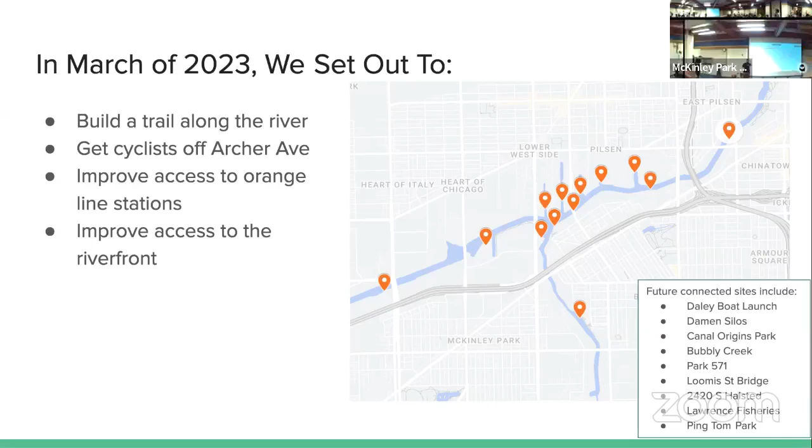This was our first map. We made it on Google to show how crazy it was to try and get to all these places along the designated bike paths. So 49 minutes if you stick to bike routes, 20-some if you went straight down Archer, and this is one of the problems that we're trying to solve, because you have to choose between getting where you need to go on time and getting where you need to go safely.

So in order to do this, we are taking advantage of some policies that already exist. So, Eladio, the project manager for this one — as you read through the physical thing or you look through the online document, and as we go through the presentation, you'll see that there's a lot of things that require big construction that are super expensive. And we're hoping that the new design guidelines for Chicago take care of a lot of that.

In 2019, the city updated the river design guidelines, and those require that anyone who buys land along the river and develops it has to create a public walking path. So it's very specific. You have to do a 30-foot setback from the edge of the river, and you have to create a 10-foot trail with gravel on the sides, specific local plants and trees, specific seating, specific lighting, and that kind of stuff has to happen.

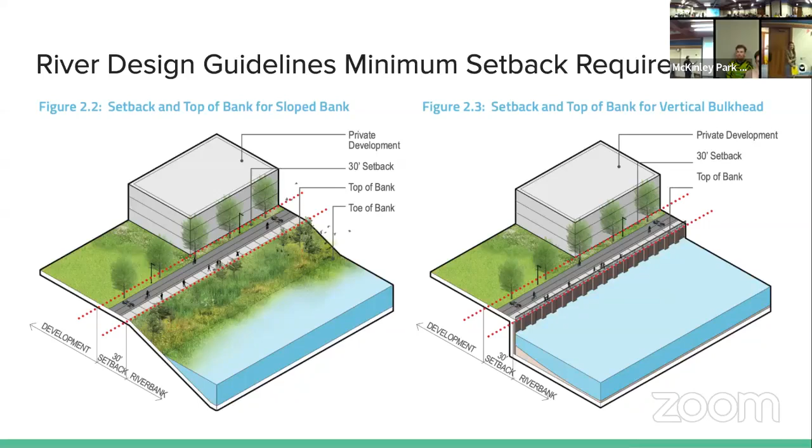And so that'll take care of some big chunks of our project. We'll also talk about the pieces that have to be done by private landowners who aren't going to do that. But here's some other pieces of the river design guidelines that specify what has to go on there if you build something on the river.

Like I said, 10-foot path, 2 feet of shoulder, specific trees. And if you've been to the South Halsted Riverwalk, which is right behind the Orange Line Halsted stop, you can see an example of a bike path, a walking path that has been built to the new guidelines.

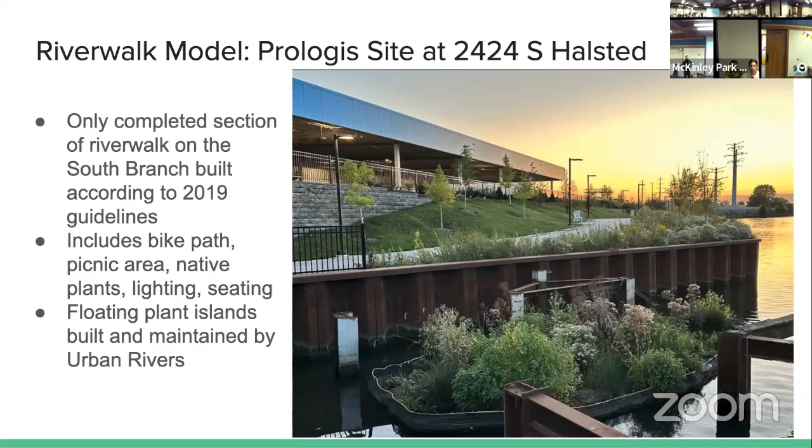So it's very pretty. If you get a chance, head down there, it's right behind the Orange Line station on Halsted. It has seating, lighting, even a floating habitat that our friends at Urban Rivers installed there. This is what the rest of the Riverwalk could look like as we progress through the years, and folks have to do this as they buy land.

And now we'll have Heidi from Living Habitats. Living Habitats is our landscape architecture firm, and they've done the physical work of making these amazing plans for us.

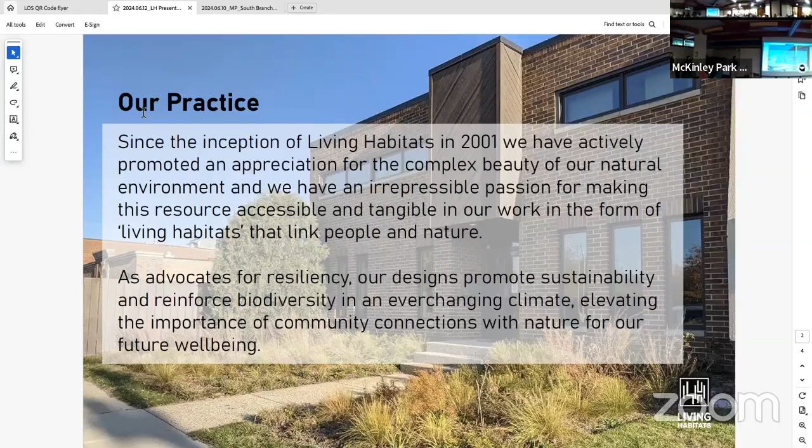To give you a flavor of the different projects that we tend to be involved in, they range in scale, and this project also demonstrates a very wide range of potential project scales that will be implemented.

To give you a little highlight, our sample project work ranges from local projects like the Chicago Botanic Garden, which many of you may be familiar with. We've got a 20-year relationship with that organization working to restore their 6 miles of shorelines, around 60 acres of lakes. We have an incredible amount of experience dealing with terrestrial and aquatic environments and how to bring people and nature together in those spaces. It's the largest garden now at the Chicago Botanic Garden, the shoreline restoration of all native species.

A little further afield, out in the Los Angeles area, we've been involved for the last several years in the Wallis Annenberg Wildlife Crossing. This is a very large project promoting habitat connectivity and restoration, in this case very specifically targeting the mountain lion and an endangered population of that species that needed increased connectivity to bring together habitat islands. Again, we have many similarities to what we're experiencing here in the city, where we have pockets of bright spots that we want to link together.

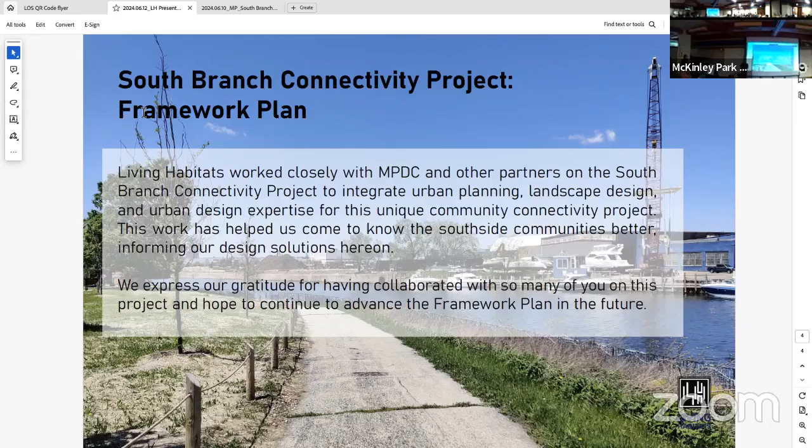Oh, it's been a year. I know, it's really weird. And a lot has happened this year. We're very excited about it. So let's see what they did, all right?

As somebody mentioned when they walked in the door, I opened up this plan and I didn't know it was 90 pages. It's not, we're obviously not gonna cover all of that before the library staff wants to go on.

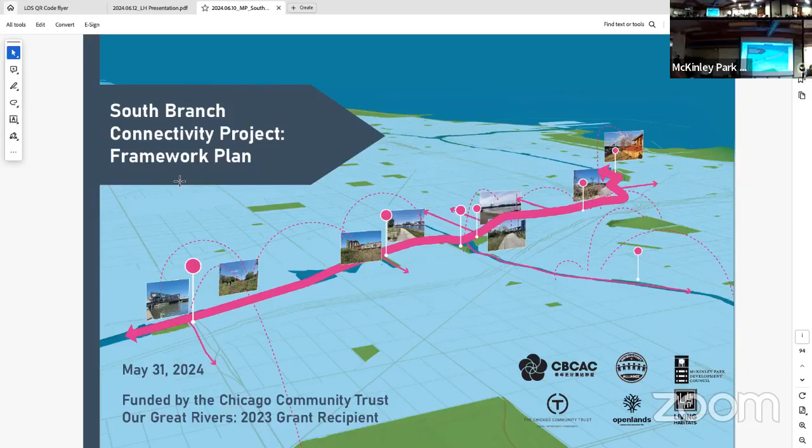So this is the area that we're looking at, and you see it's a lot bigger than just the river, right? We're not just looking at how you move along the river, but also how you would get to the river and how you would use a riverfront path to get to other places.

So while the path runs here on the south bank, and physically goes through McKinley Park, Bridgeport, and Chinatown, those aren't the only neighborhoods it impacts, right? Obviously, if you live in Pilsen or Little Village and you want to come down to catch a train on Western, Bridgeport, or Ashland, that impacts you too. So I want to point out that while it goes through 3 neighborhoods, it directly impacts at least 6.

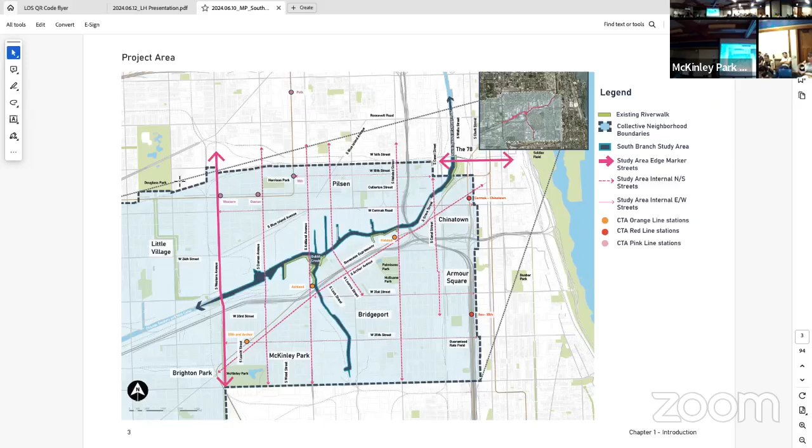So some things that came out as more boiled-up goals in the final version of the plan are to provide a continuous multi-use trail from Richard J. Daley Boat Launch, which is the park just on the western side of Western Avenue—the mythical land that most people don't know is there.

All the way to Ping Tom Park in Chinatown. This names out specific sections of the park we need to look at, and calls out the fact that the Prologis section near Halsted is already there. So how do we do that? Well, one of the things we want to do is improve safety, mobility, and accessibility for cyclists along the South Branch and adjacent areas.

I also want to call out that we are calling for improvements to Archer Avenue, which several people have already asked about tonight. Yes, of course we want bike lanes on Archer Avenue. This isn't meant to be an either-or, but given the way the state is moving with the parts of Archer they control, we might actually get this first. So we'd like to have both—the place you can take your kid for a bike ride, and the place you might want to hurry up and get to work. That's not usually the case.

A couple other things: improving access to Ping Tom Park from 18th Street is also important. One of the ironies is that Pingtom Park exists because nobody wanted that property—since you can't get to it, that's how they got the land for the park. However, now that the park exists, everyone wants to get there.

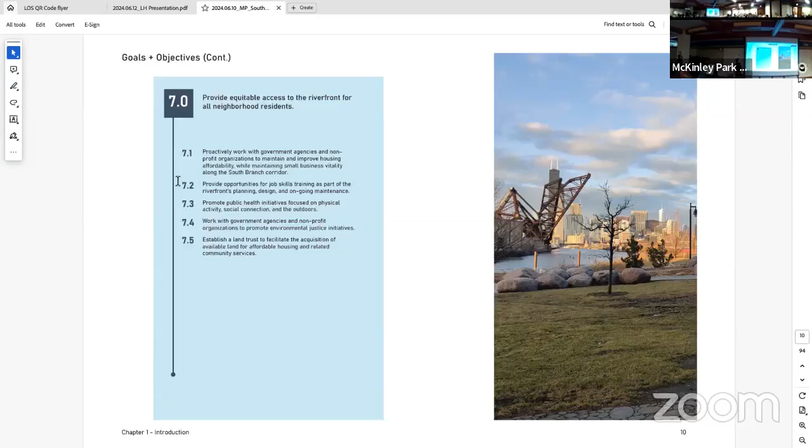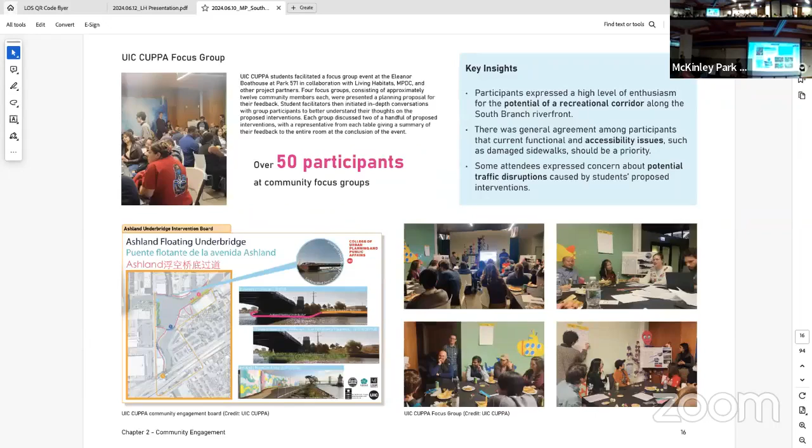So community engagement, quite a few of you were here for this event. It took us a while. Overall, we had over 600 neighbors who participated in community engagement events, whether you came here for a talk, attended one of the focus groups with UIC, or one of the small events. We had about 100 surveys, 200 participants, really 250 participants at some of those events, and then even more people for our lecture series that came along with this.

And I want to get down to where we actually landed on it. So, things that are important: people want a low stress biking and pedestrian network. People value existing parks and they want to use the riverfront to create additional recreational space.

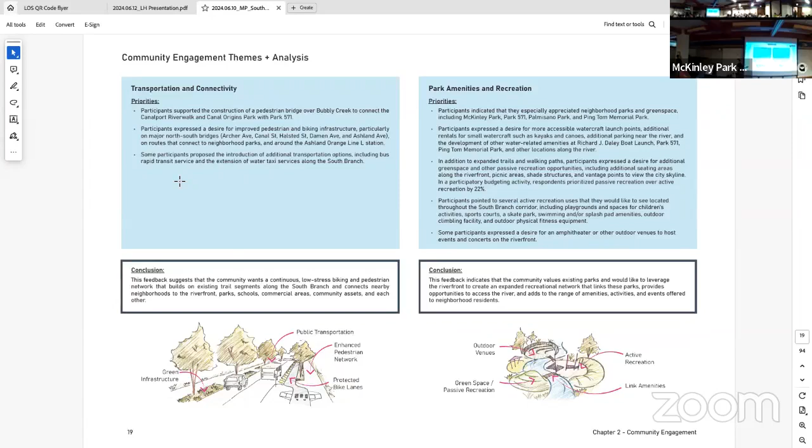Including active and passive recreation. When we say active recreation, that's things like playgrounds and sports fields. When we say passive recreation, that's more like running, biking, or fishing.

People want a real sense of place, to use some of the industrial relics and maintain them, to kind of keep the vibe of like, hey, there's something here, this is part of something, this thing has a history, but at the same time to also move forward.

And also to have, in the long run, some interpretive signage to explain things that happened. Like, for example, why was Bridgeport an Irish neighborhood? Because they came here to dig the canals. What about the Native American trails that became Archer Avenue? Yeah, so things like that about our history, how different groups of immigrants have come in and out of here, and how that shapes the city as we know it today and how that shapes our neighborhood.

So we do want to honor all of that and the things that go on with that in the future. That also feeds into arts and cultural community gatherings. One of the most cited places people want to get to is the National Museum of Mexican Art, which is interesting, in Pilsen.

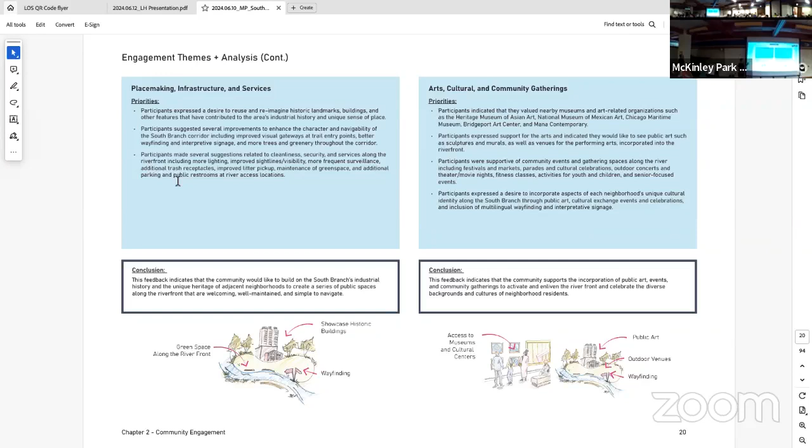So we are looking at, like, there's a lot of things that people want to be able to get to, and they range from Mariano's, because that can also be very difficult on foot trying to get around Bubbly Creek, Mariano's or Jewel, or getting to work, but also cultural assets like museums and other community gatherings.

All right, environmental and sustainability goals. People certainly want to see continued environmental cleanup. We do have Superfund sites on this path, and that is one of the reasons that development will take a while. We do also know, and we'll get to it in a little bit, that one of them is projected to get cleaned up this year. So things are moving at the speed of government, but they are moving.

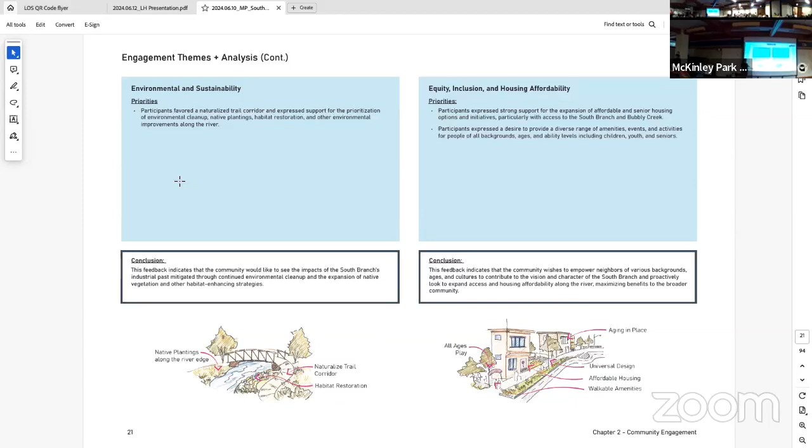That also feeds into land use and zoning policy. On the one hand, a lot of you and a lot of us have been very involved in trying to keep new heavy industry out of here. Doing that in the long run does mean changing land use and zoning policy, and that's also something that takes a while, but it's all part of this plan.

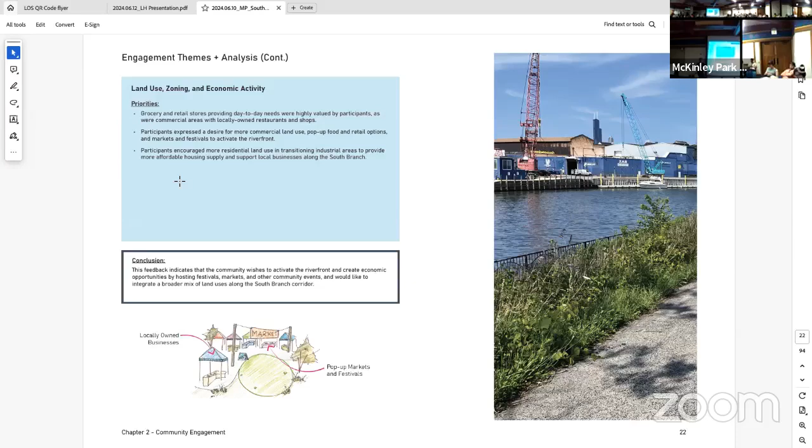Question on community engagement. I mean, you're here, right? So you're doing your part.

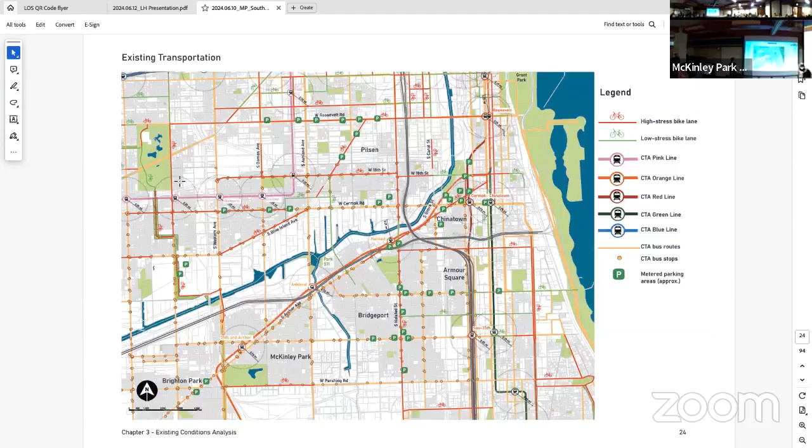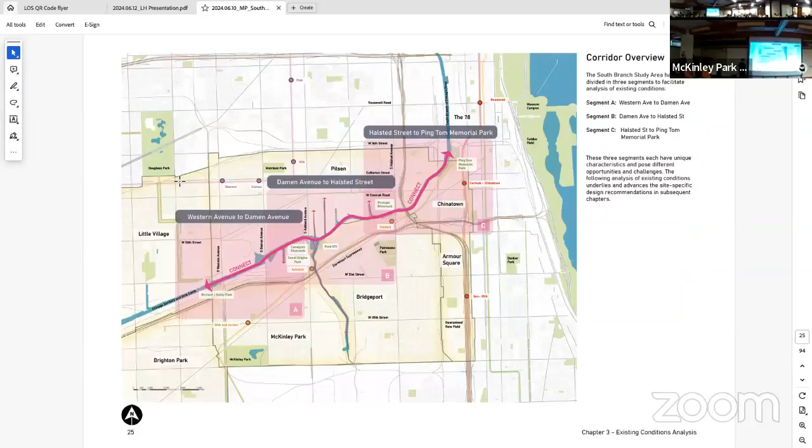So existing conditions. There's a lot of stuff on and around the riverfront, with varying conditions, shapes and sizes. So for purposes of the plan, we've split it up into three sections: Western to Damen, Damen to Halsted, and Halsted to Ping Tom. You'll see why that's important, and how drastically different the conditions are in those three sections.

So here is Western to Damen. In many ways, this is going to be the hardest part to implement. Unless you've seen it from the water, you probably have not seen the river edge at this location. All of this right here is a natural river edge, which is a great opportunity. It's the only section of our path that is still a natural river edge, heavily forested. It's beautiful, but that also makes it inaccessible, right?

So what will happen with those sections really depends on what comes next. The first part we want to talk about is the Western Avenue Bridge—some of you might have attended the meeting a while back. The Western Avenue Bridge is supposed to be renovated, shored up, in the not terribly distant future. CDOT has published drawings that do include bike lanes on the bridge, but nothing for getting on and off the bridge, and nothing to connect to at the foot of the bridge. So there is still a condition where you literally cannot safely cross Western on foot between Blue Island and about 34th, 35th. That's something we would like to remedy, to get a way across Western, because nobody needs to be running across those giant concrete pillars to get from one side to the other.

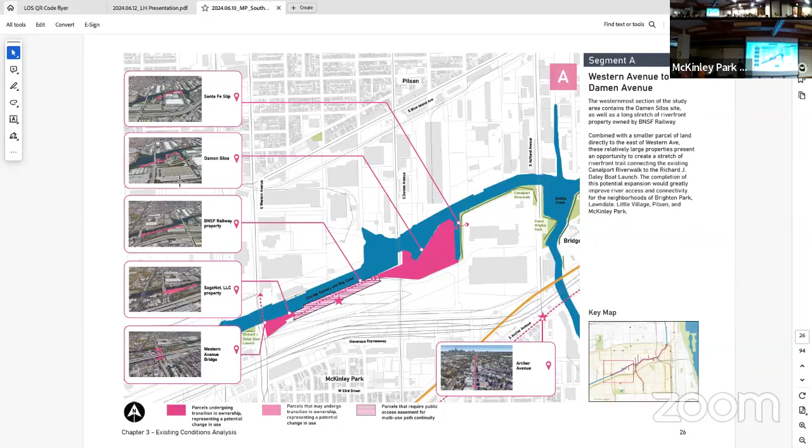So next, get this in. All right, great. So the next section we're going to pick up is Canalport Riverwalk.

I want you guys to know that there's a coming change here to this lot. The existing owners want to build a new building on their lot, and the initial plans seem reasonable—they're not going to be changing the lot lines, so it won't directly affect the park. But one of the things we're hoping to work with them on is getting some better signage into Canalport Riverwalk. When Eladio and I went to the meeting with them, one of the first things they said is that there's this park across the street and it's really nice, but you can't get there. So we are cautiously optimistic that we'll be able to work with them to improve that situation, since they seem to want to use it for themselves and their employees.

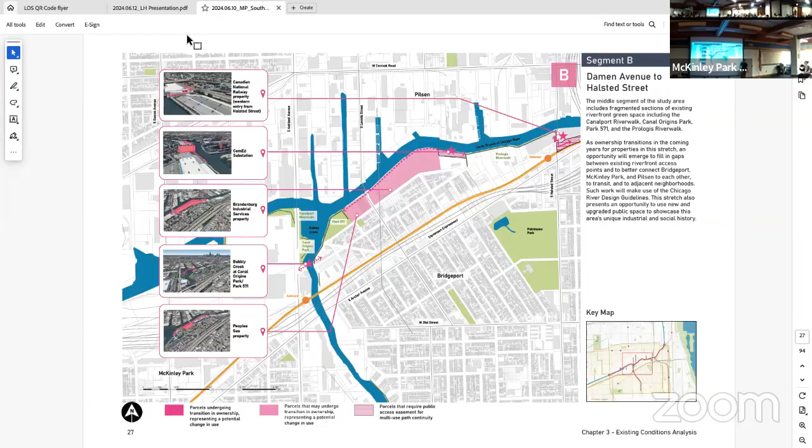No, not having it. All right.

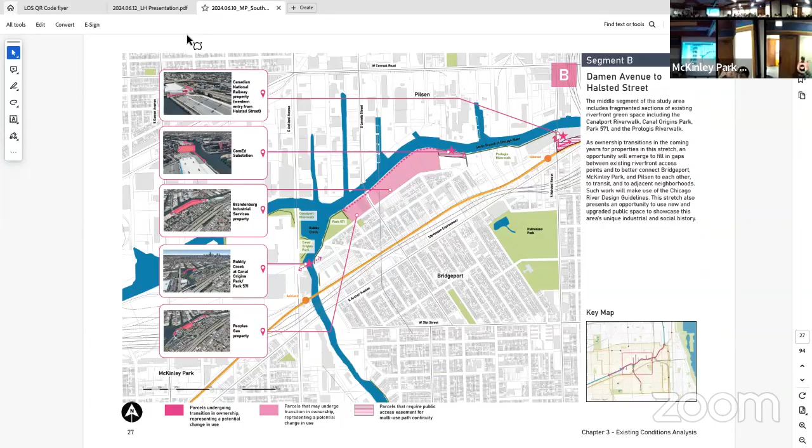Okay, so this is that same section in yellow that I just talked about, to help you get oriented. What happens after that is really interesting. You might have never noticed Grove Street, but it's about to become a lot more important to Chinatown.

So on the corner right here, here's Wilson's Place, here's Marketplace 88, Chinatown Square is this way. Right here, at Cermak Canal and the river, is a historic building that's about to be renovated into a hotel and Asian lifestyle center. And all of their traffic is going to come onto Grove Street. So this is Grove Street here.

Grove Street is only paved to about here, and the rest of it's dirt. But it exists already, so we are asking the railroad to help us with their section - unpaved, but it's there - to connect to what's called this little sliver of IDOT, and the rest of it's CDOT. We're just asking them to pave an existing street and open it to bicycles.

And that will connect to this new property, the Pacific Development, which has streetscaping as part of its development plan, so the developer will be required to do their section there. We're working with them and with DPD, and we got the initial plans. They had plans for 100 bike racks, but no - we're like, come on guys, somebody think about the rest of this, right?

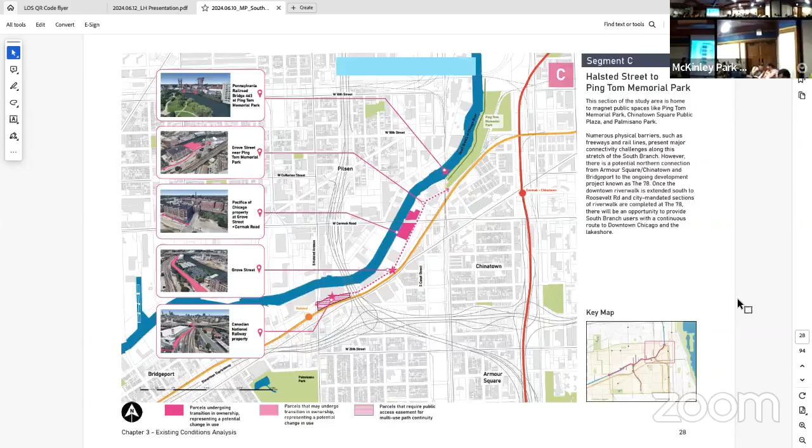All right, so we're gonna fast forward a bit here, to talk a little bit about what's next.

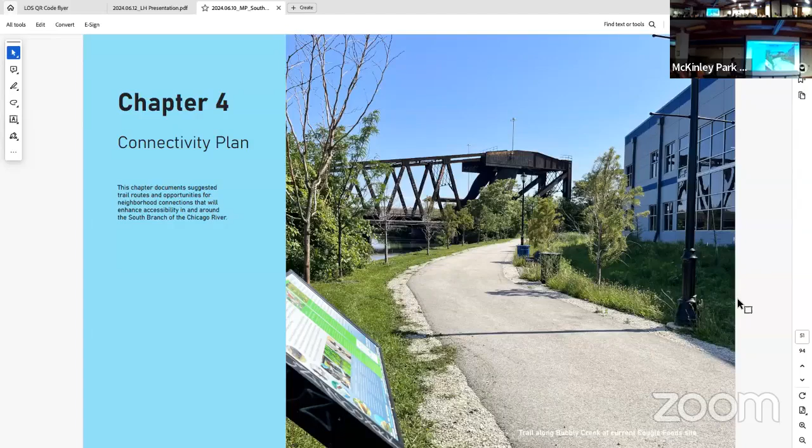People have cited the Wild Mile as an example, and it might look kind of like that, but I want to point out that the support system on the Wild Mile is inadequate. There are other examples of ways to do it that are more stable, so just in case anybody had that thought, we're looking at those.

The other spot where we may have to go under is up here, under the bridge that walks on Ping Tom. That's one option. Realistically, in the short term, we'll probably be looking at access across 18th Street there on existing bike lanes, but in the long run, this is the only space where we have like a plan A and a plan B.

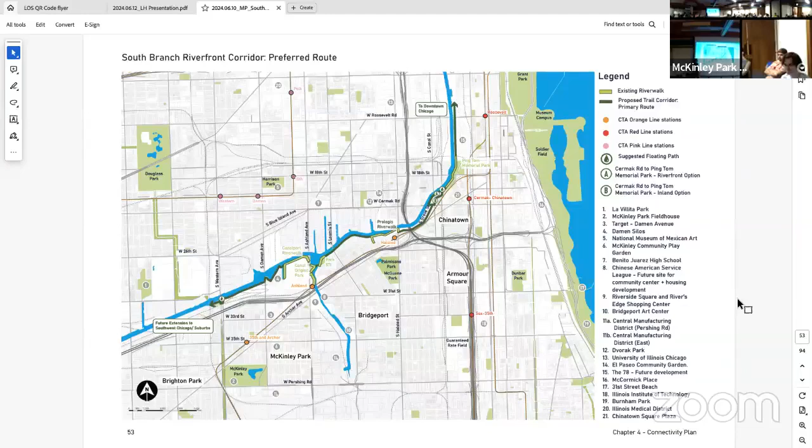So in the interim, we did look at how you can get from A to B in some of these places on existing streets. Because of one-ways and because of the way I-55 cuts things off, it's pretty difficult to connect Bubbly Creek from Bridgeport and McKinley Park. There really isn't a good way to do it. If you wanted to connect, there is no through street from Ashland to Damen that gets you to the riverfront. It's blocked off by I-55 and by railroad tracks. It's just not there. And likewise, if you can't get across the water, you're going to have to come down Archer.

As someone said, we're finally going to get bike lanes on Archer. Yes, but not here, not yet. So we have to keep working on that. Every little piece helps, every little piece helps.

But to get here, you would have to come down to 33rd Street and then still duck around to 34th to be able to cross to the last leg of Western Avenue and actually get up here. So that's not a great solution, but it's what exists today. We did want to point out this is the safest, most efficacious path available right now.

The other route here is a little bit different. Up to Halsted, we're pretty confident we'll get all of this, and then Grove Street seems very realistic. This last leg is going to take some doing, so at least in the short term, we'll probably direct cyclists onto Canal Street, where there's mostly an existing bike lane, and 18th Street, which has an existing bike lane. But this makes the demand for access to Ping Tom Park from 18th Street even more important. People already want that because there's only one entrance to Ping Tom - you have to go all the way up and around and back in and cross the railroad track. So access from 18th Street would really open up that park in a lot of ways. In a little bit we'll show you some drawings of how we can do that.

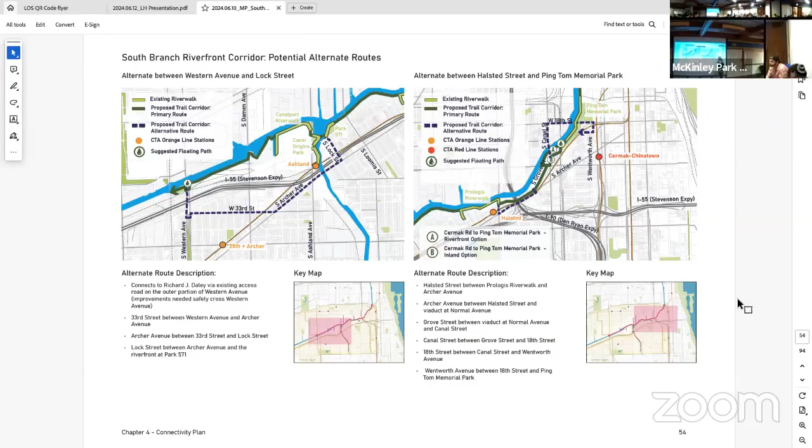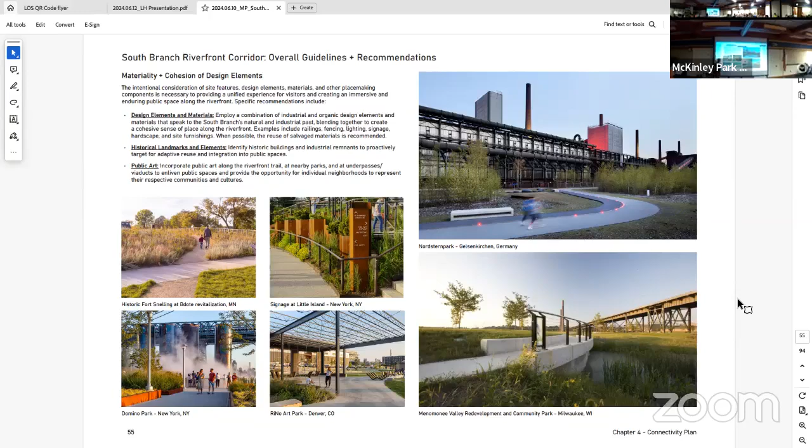Before we get to specific sites, I also just want to talk about the vibe. So these are some examples, real life examples from other places of ways that we could do this - things where they've taken old ironworks or old building materials and given them new life in a new place.

Examples of signage, examples of monuments, green spaces - one of the things we found out in community engagement is people really want green spaces that look natural. Manicured is nice, but people want to feel like they're out in the country, and that's realistic. Also people want public spaces, activation places to hang out - things that aren't overly structured for any particular event, that could be flexible for different kinds of events, whether that's a picnic gathering, a place to have a birthday party, or a small music venue. Flexible spaces for many different kinds of events.

I also want to point out we're looking especially at the Ashland L station and how dark and difficult to see it is in there. Looking at some ways you can brighten something up with maybe some paint and lighting - it doesn't take a lot to make something better. So also thinking about those opportunities for public art.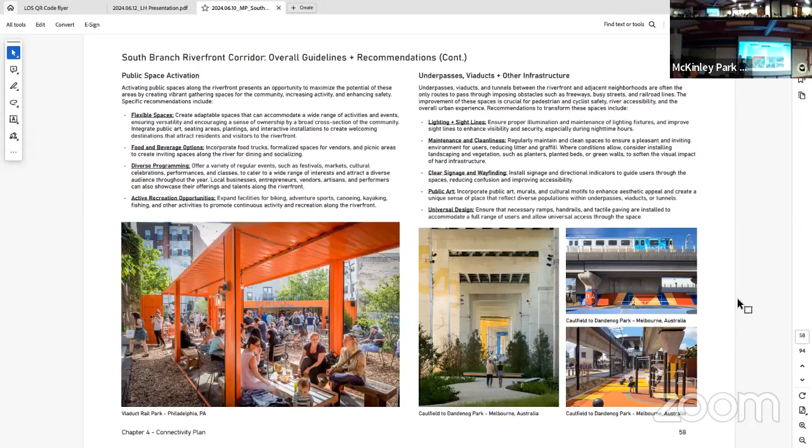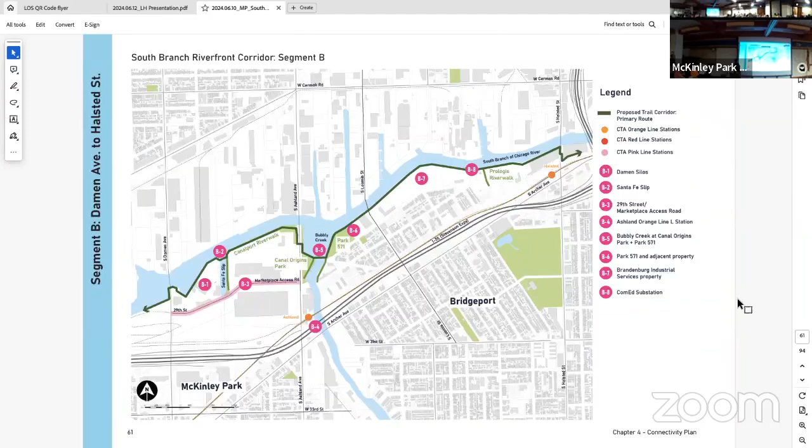So these are the sections we just went over, depending on each lot - that's about Western. These are some more examples for placemaking, so really want to think about that. We have some very unique places on the riverfront, like the silos or even Park 571 - the building itself is really eye-catching, but how do you build things around it that give it a vibe and are still useful? So thinking about use of materials, and how do you make this more functional. These are, for example, some examples of footbridges, and you might see something like that crossing from the Damen Silos to Canalport Riverwalk in the future.

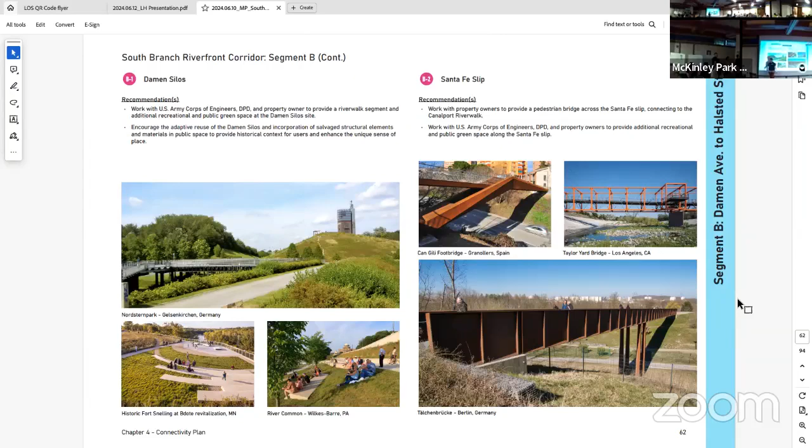And color. So 29th Street, which is the road that goes from Ashland to that giant on-ramp up to the Damen overpass - the big scary one that's always full of trucks - also not great for cycling, right? But if you worked at FedEx, you might be doing that. So things to think about brightening that up also with some color and a little bit of space. I did notice when we were out there last weekend, they moved a bunch of these around to kind of sort of create a bike lane. It's something.

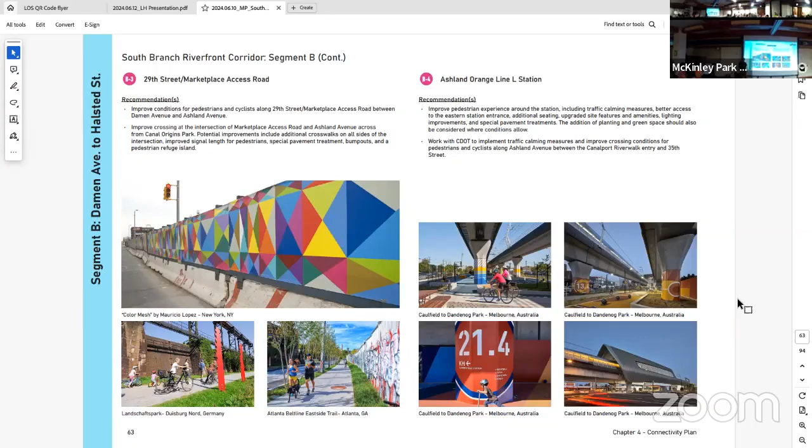And then Bubbly Creek. Here's one way we could finally have this bridge over Bubbly Creek. I love this drawing, the level of detail, where they also put in the kayakers and the floating islands, more floating islands than we have now, and our beautiful view of the skyline.

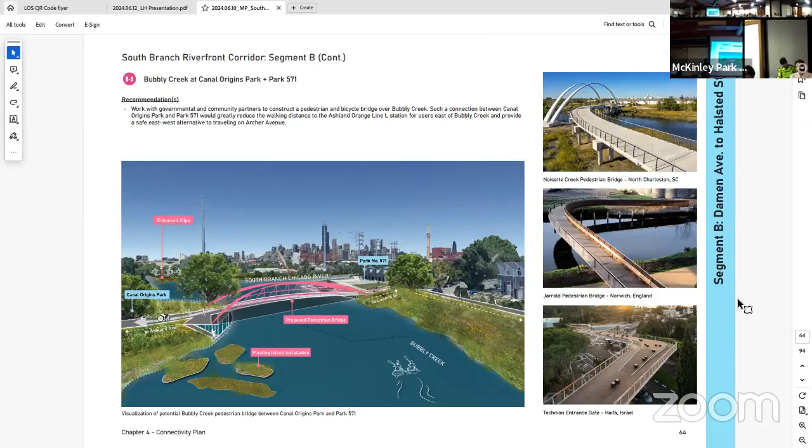Here's some other examples of what those bridges can look like, and more bridges and ways to connect parks. We currently have 6 parks on the waterfront and they're all chopped up. So how do we put these things back together and make them coherent?

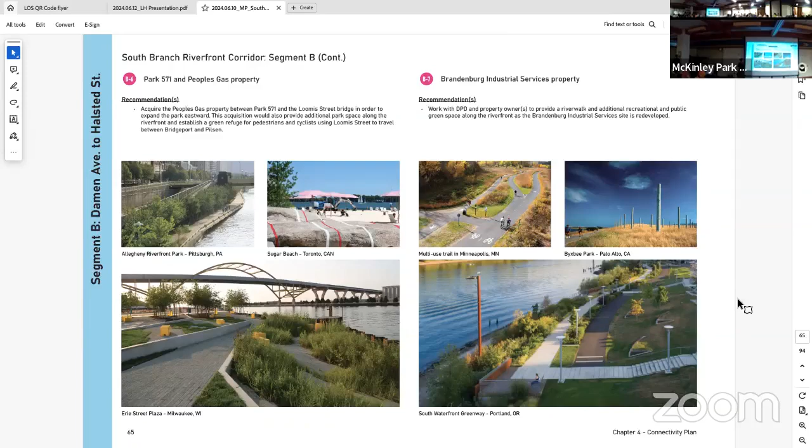So this is also a vision of how we could do ComEd. Right now, the existing Prologis Riverwalk is right here, and we really are just looking to continue things straight on the same way. When we pitched ComEd for this idea, we did show them these drawings and also some other ideas and things to be done with their security fence.

They have to have the security fence. Nobody needs to get electrocuted. But it doesn't have to be ugly, and that could be a really interesting way to get some placemaking and some community art projects.

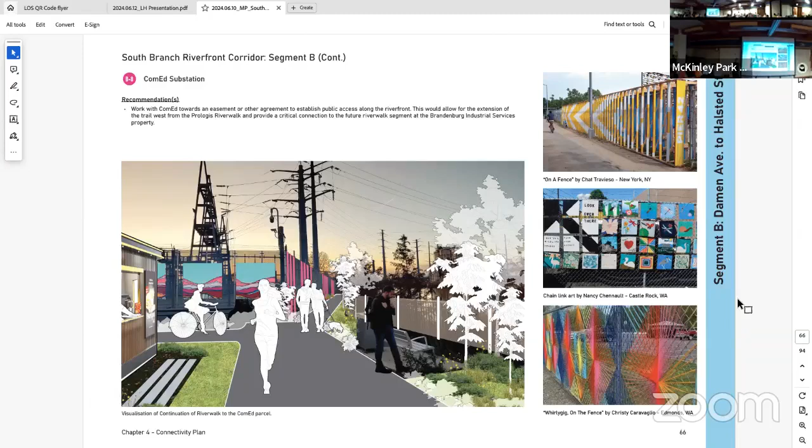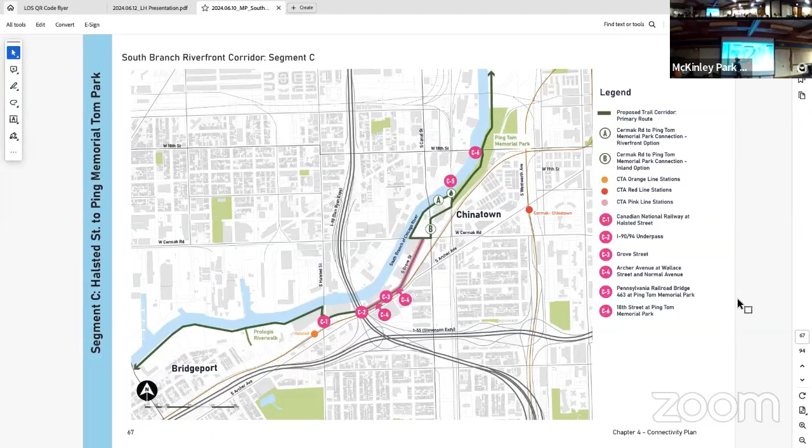Color. You just really like color. That's also one of the things that we find out. Well, we have a lot of murals around here, and it goes with the culture, right? It goes with all of the cultures that live here. People like bright colors and we love our murals.

These are some ideas of things that could be done at the I-90/94 underpass, which is right where the railroad access road meets the end of Grove Street, under I-94. I thought this is a really interesting example of how to brighten up a space like that and make it a little more inviting.

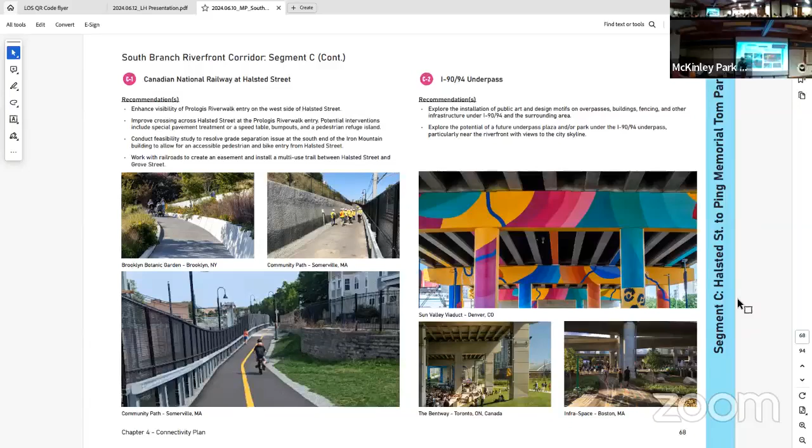These are also some examples of how we can get through that concrete knee wall at Halsted. These are a little bit dug out, and how you can get through a space like that, in pictures.

Coalition for a Better Chinese American Community has actually done some design work on how to revitalize viaducts in Chinatown with some paint and lighting and other art projects. So we're excited to see what they come up with.

We're going to get a pilot on 26th Street, I believe, in the next year. We're looking at all the viaducts. One of the things that would be nice to do here too is there are 3 viaducts between Archer and Grove, and right now only one of them is open. If they were all open, it would be a lot easier for people to escape Archer. So that's also something we look at, and also breaking them up.

If you've ever walked or biked to Park 571, you go under that bridge where you have to go under the interstate and then under the railroad, and it's dark and wet, you get dripped on. We'd like to do something about that.

And then finally, things that could happen around Ping Tom Park. This is right from our very own Riverwalk. This shelter is actually there to keep particles off you when the bridge lifts. It's a shield. We have examples of things like this right here in our own city that we could do in other places to facilitate getting under that bridge safely.

These are also some ideas for how you can get from 18th Street to Ping Tom. This is an example from the 606 right here in Chicago: a spiral that doesn't take up a lot of space, geographically speaking, to get down from the trail onto the street. We could use something like that to get to the park, or here's the Texas-size version from Austin.

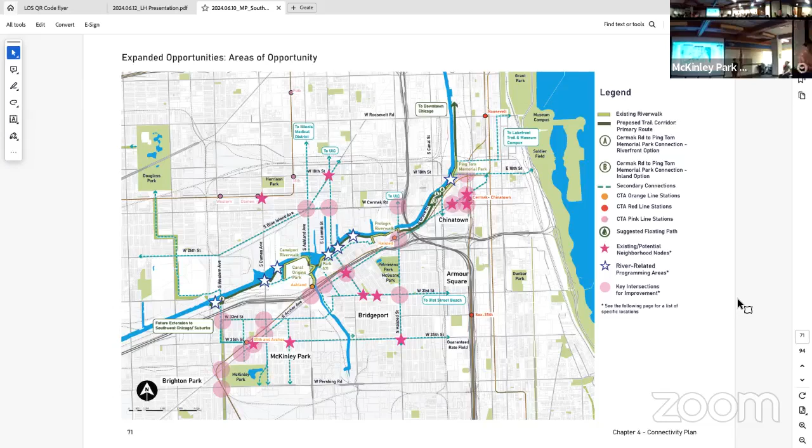I'm going to wrap it up here because I want to make sure we have time for questions. But I do want to point out that we did not just look at what's on the river, we also looked at connecting to the river. These are some areas of opportunity with key intersections that need improvement, including most major intersections along Archer as well as other areas like Western and Ashland.

You can read the full list for yourself in your own digital copy. But I also want to point out bike lanes on major streets, because it's not just about using it for transportation, people have to get to the river to use it for transportation, and all of those connections also need to be safer.

The pink zones here are areas of priority for bicycle and pedestrian access. One of the things I specifically want to point out is this right here: the idea of not just a pedestrian bridge between the two parks, but also a pedestrian bridge behind the Marianos, possibly connecting it to the projected CASL development.

Chinese American Service League is building a new community center and senior housing right off of Archer, and that gives us a great opportunity. They're bringing in a lot of senior citizens who need to use public transit, which gives us more emphasis to say this really needs to be safer. All those people have to get to the grocery store, so we'd like to make that easier by having another bridge further down here as well. We'll see how that goes.

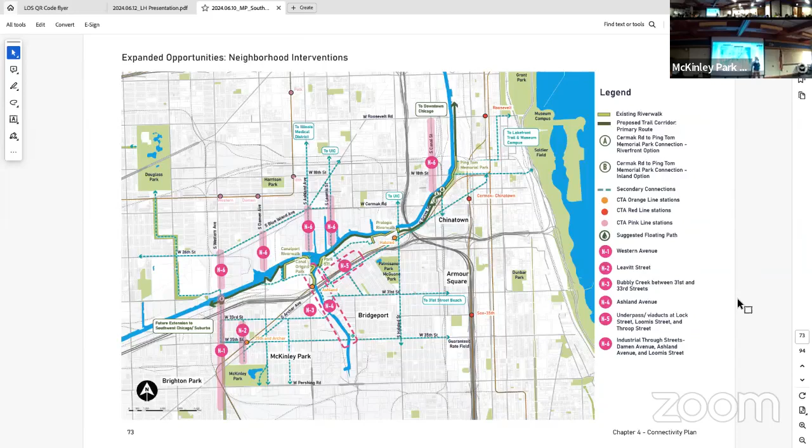I think this is a good time to stop. There's lots of pretty pictures of ways it could be, but I don't want to miss the opportunity to take questions. The library staff is going to start pushing this by a quarter till. So what would you like to know?

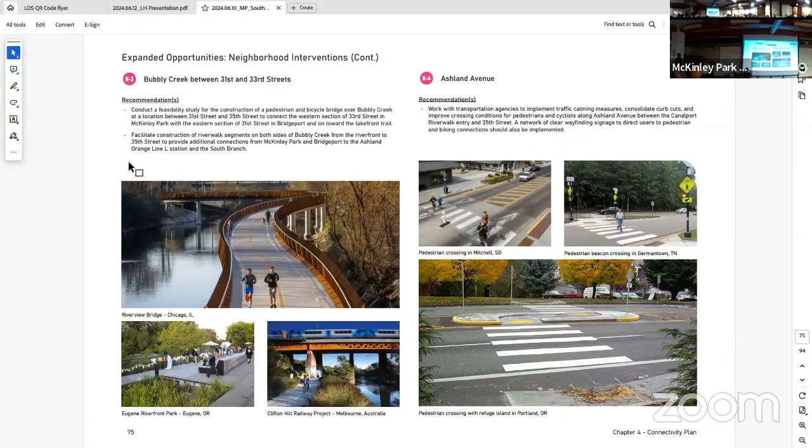More the merrier. In fact, one of the things I want to ask you guys tonight before I lose track of it is, we would like to have some engagement events this summer, opportunities for people to come out and see all of this. One of the ways we're thinking of doing that is with a bike ride.

So let's just go ahead and ask that question now. We had a couple of options for how people might want to see more of this in person. Would you be interested in a bike ride? Okay, all right. Would you be interested in a walk? Keep in mind, the shorter version of the walk is probably just 2 miles. Would you be interested in seeing it in the water, if we could get things to paddle? Okay, good. So we wanted to see what people might be into, but those are the kind of events I think we'd like to have this summer, to get people outside and engage more.

Speaking of engagement, we are also moving forward to the next steps of our project with the National Park Service. We won a competitive process to have technical assistance from them for at least the next year. The things we're going to be working with them on are wayfinding—how do I get around on the river, what kind of signage do we need, where should it go, what are the important places to get to and from.

Also wayfinding to get people between the river and neighborhood points of interest, so everything from Mariano's to 18th Street to 35th Street to Chinatown Square—how do you get between all those places? So thinking about it as transportation on the river and also transportation to and from the river.

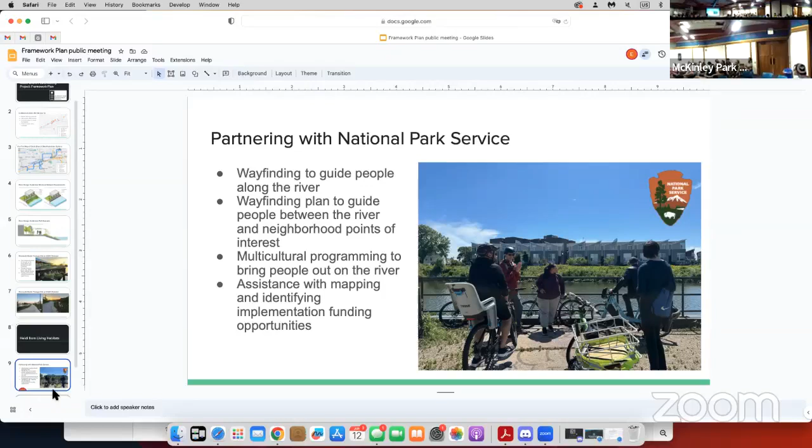My question, this is a really big question—I haven't been following the process super closely, and I haven't gone through the report yet, so those are my caveats. I guess, especially moving forward, what happens? Is it like MPDC, or MPDC and the other partners you started with, basically holding or coordinating this process? Once this gets rolling, like hiring design build firms or construction groups, or issuing calls for artists, does MPDC decide who those are?

Does that go under city requirements for things like minority owned businesses, women owned businesses, those different designations, local hiring? Who makes those kinds of determinations through the implementation process, and who is actually getting engaged?

That part, I don't know. Yeah, that's a really high level question looking forward. No, that's a fabulous question. Thank you for asking that.

I don't have a single answer to give you, which is probably a good thing, because a lot of people will make decisions, and that's because this path is gonna happen one lot at a time.

Depending on the situation with the lot, the decision makers will be different. For example, with a commercial lot that is sold or being developed, obviously the developer is gonna have a lot to do with that. So our role as MPDC is first off to make sure neighbors know that's happening, and to say, here's when the public meeting is, here's how you can get involved, here are some things you need to tell people, tell people what you want.